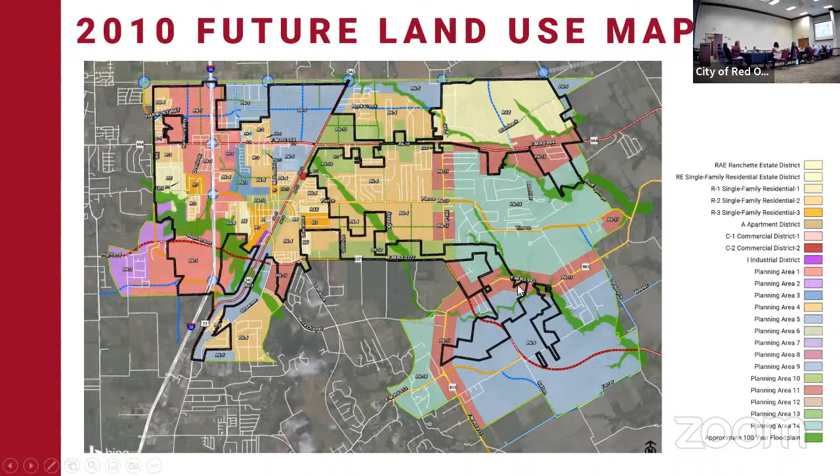So this is some of the things that we looked at in 2010. This is that future land use map today. The lighter black line still just defines your city limits, and you'll see we've got everything defined out to all of our ETJ. And then we've got a few areas highlighted in this bold black area that I wanted to touch on a little bit.

This one up here in the top right, this blue area, that was a change, and that was something we looked at because this purple line, which you'll hear in just a minute when Brian goes through the transportation plan, is the current proposed alignment of Loop 9. So we know that's going to have a big effect on Red Oak and what changes here. That was one of the significant changes.

Some of this area right here, this hot pink along 342, we've changed a little bit to map some of the current developments going on. And then there were some changes if you compare the plans. Generally it still remains a residential area, but we were careful to also look at some of the industrial uses and data centers and the opportunities you have with that, and also recognizing there are some challenges with water service down in this area. So this plan takes that into account.

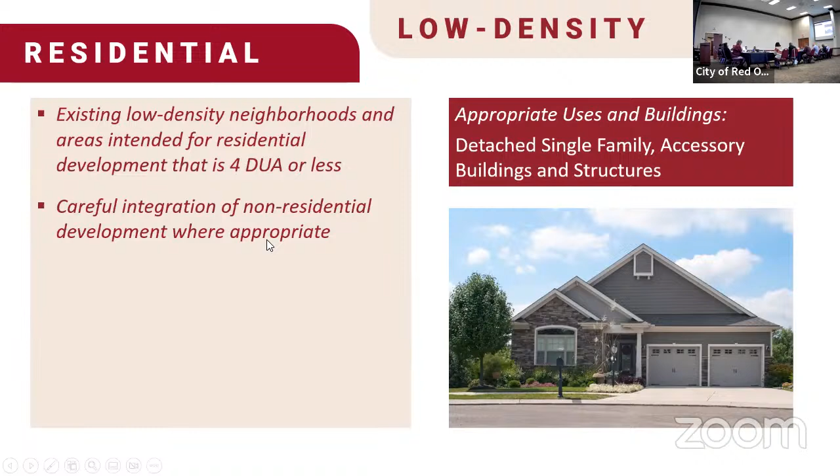So in each of those land use categories, we wanted to put definitions so when you see those types of things, you know what they are. Within our residential categories, we've got a ranch estate category, which is that 1 acre dwelling unit or lot sizes over 1 acre, in some of our rural areas, probably mostly in the eastern areas of the city, some on septic as they come down in that southeast area. We then have low density residential, development of about 4 dwelling units or less - this is just an example of what would fit into that category.

These categories are explained in the pages after page 35. We have a medium density category - you can see examples of row homes, townhomes, the types of houses appropriate within that category. We have a high density category, where we flip over and look at houses that exceed 11 dwelling units, and we've got criteria for what that would look like.

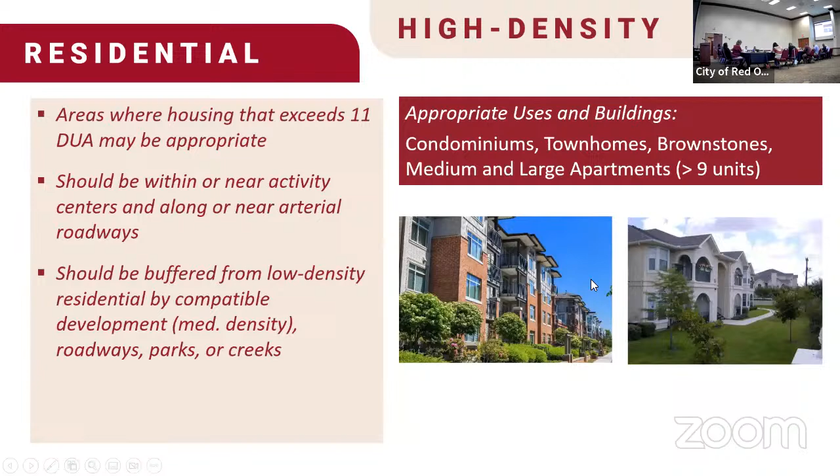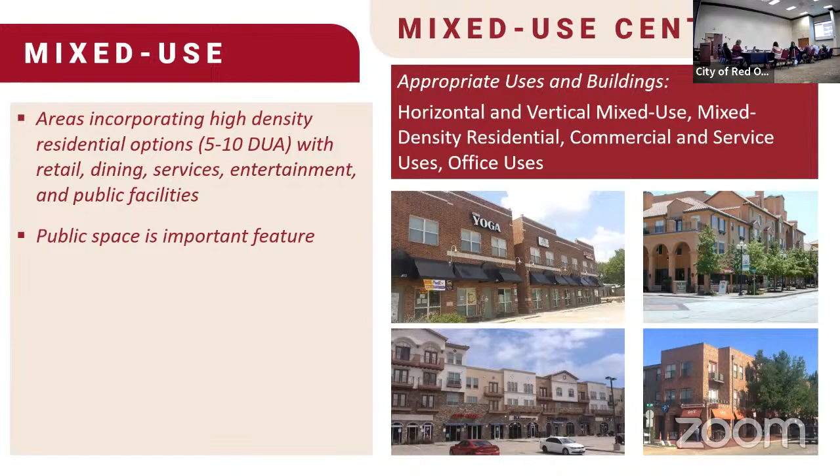Then we have a mixed use category, where you truly see a mix of uses, be it residential and commercial - you see different types of examples within these photos. Then within our non-residential categories, you've got retail categories, which I'm sure you're all familiar with, from different types of retail and restaurant environments that would fit within that.

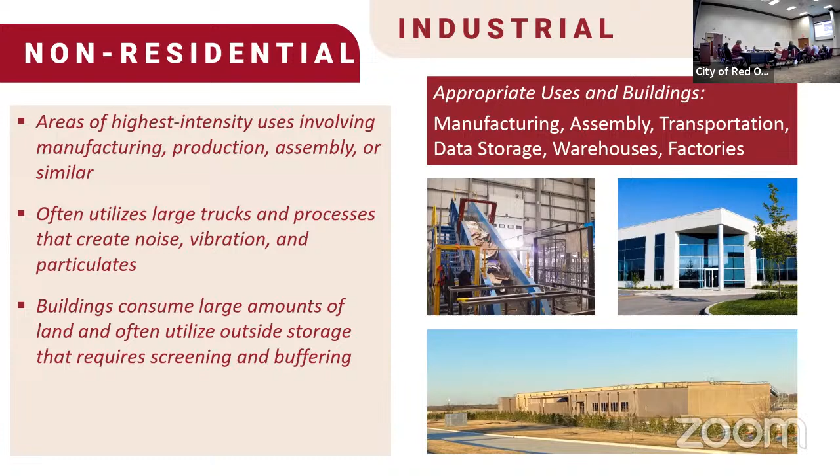We have our commercial category, which is more your bigger restaurant, office, and strip center type development. We have an industrial category for manufacturing, assembly, data storage, warehouses. And then we have an office category for medical, real estate, and other professional services. We have a public and semi-public category, which is a lot of your schools, hospitals, churches, those types of uses.

And then we have an Old Town overlay, that is primarily mixed use, but working primarily within your Old Town and downtown area. Overall, the page that follows the land use chapter goes through specific actions related to land use. Without reading every one, some key things are looking at choices, making sure we have diverse neighborhoods, and looking at the areas within the ETJ. Each of those recommendations ties back to one or more of the guiding principles within the plan.

Let me point out, I know council is aware, and P&Z probably too - Parks doesn't deal with zoning much, and for some staff. A lot of these planning areas, the uses overlap within a planning area. So that means you can't just say, okay, I'm in planning area 5, so I just want to put residential in this whole big planning area. That's not exactly how it works, because then you bring it back down and do a PD.

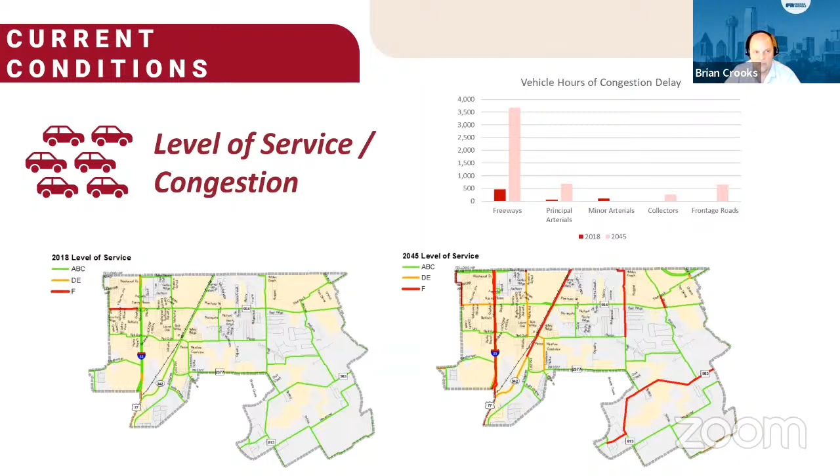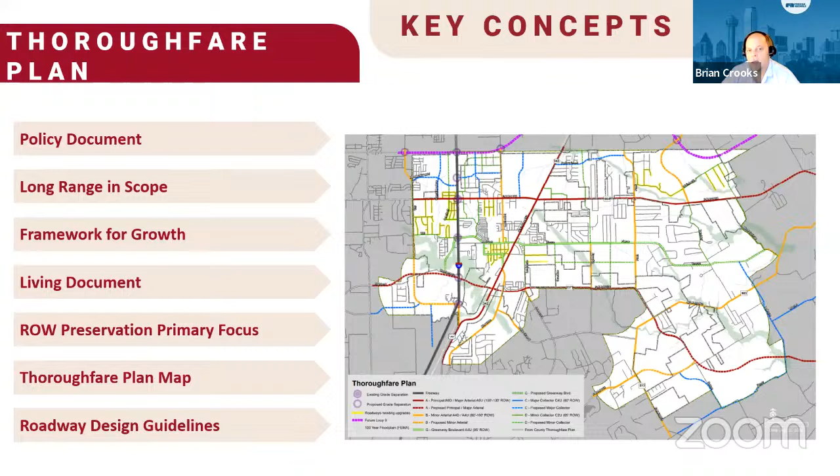In terms of changes from the previous plan, one of the biggest changes is Loop 9. We have connections to the proposed grade separations that TxDOT has to the north. We're also seeing a revised greenway network and some collector network updates. In the eastern area, we're not seeing very many changes at all, no real changes to the eastern thoroughfare plans. And then we see the extension of Old Road across to 35.

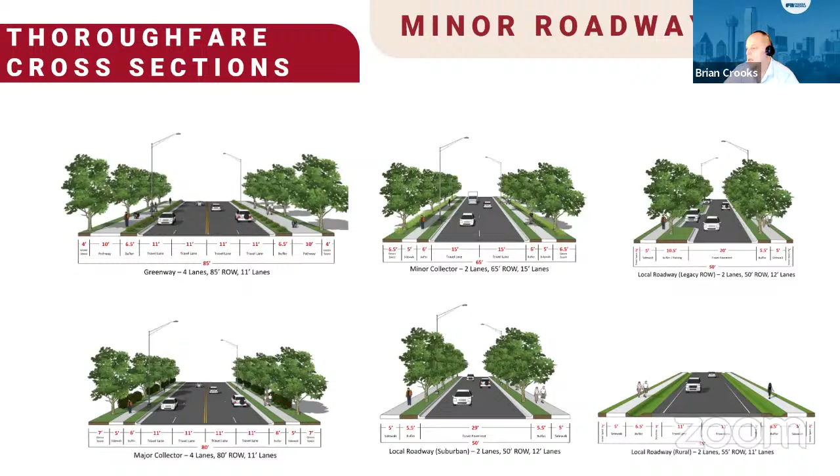So, summary: what are the most important things? One, we have to regularly update the plan, so that as new projects come up, whether within the city or external like Loop 9, the plan is revised to take advantage of these changes. Again, with the rise of remote work, it's important to review emerging technologies and see how we can apply them to the city. We also want to apply these thoroughfare design standards to our zoning ordinances and other plans to ensure continuity and connectivity. And we want to participate in regional planning efforts through COG and the state to take advantage of opportunities, whether funding or coordinating with other agencies on new programs, so we get the best value for our transportation dollar.

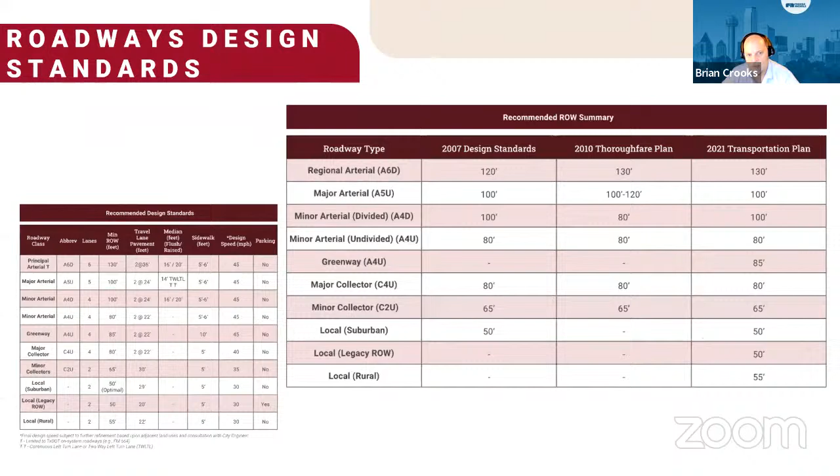One thing I should have mentioned is that the plan includes extending FM 2377 across IH35 - another needed east-west connection. Wendy, can you go back up a couple of slides to the thoroughfare plan? There we go. If you look at FM 2377, we want to extend that all the way across SH342 and IH35 to get that additional east-west connection, because we're concerned that FM 664 won't be enough long-term - we're going to need another east-west connection.

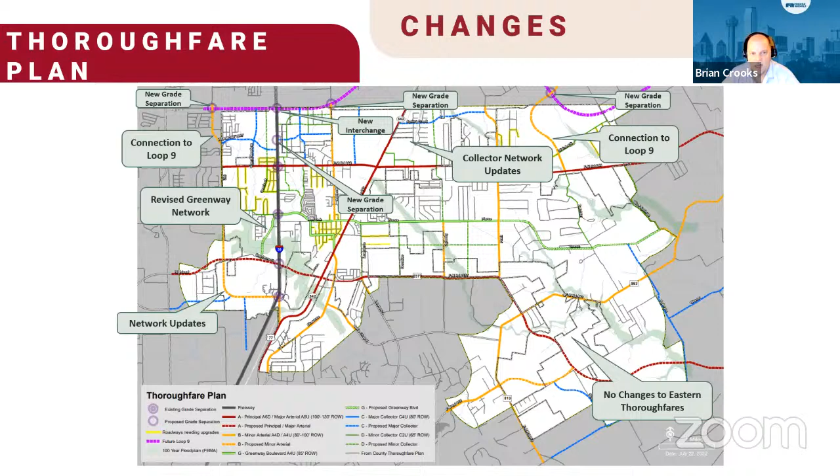Okay, Wendy, can you take me all the way back? And then, to construct the Greenway corridor is one of our final recommendations.

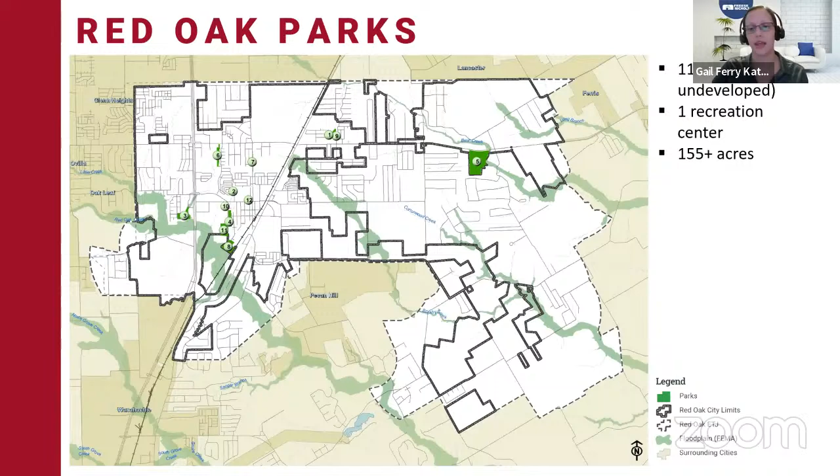The needs assessment was a 3-pronged analysis. We had a demand-based assessment, where we looked at all the input received from the community to determine, from their standpoint, what the parks and recreation needs are. Standards-based looks at the quantity and location of parkland - the size and types of parks and the areas they serve - and then the amount of amenities, like the number of playgrounds and basketball courts, for example.

And then the resource-based assessment looks at your natural and man-made resources to see what might be further leveraged for recreational benefit. So I'm going to present just a few highlights from it on the next slide.

One of the things I like to bring to the forefront is what we heard from you all, some of the stakeholders we talked to at the beginning of the process, and working with our committee throughout. Some key desires that came up were expanding the trail network, developing indoor recreation options at a recreation center, for example a skate park, having outdoor spaces for events, maybe some space for food trucks, and access to Wi-Fi in the parks.

In terms of issues and concerns, the biggest things we heard were that not everybody knows what is out there, what the options are, or where the parks are. And I think the next slide is a very telling survey response. We had close to 300 survey responses, and when we asked the community if they could only do one thing to their parks and recreation system, what would they do? It was adding trails, providing opportunities for kids and teens to have additional recreation options, and in general just adding. So there wasn't a huge amount of concern about what was there now - it was a desire for more.

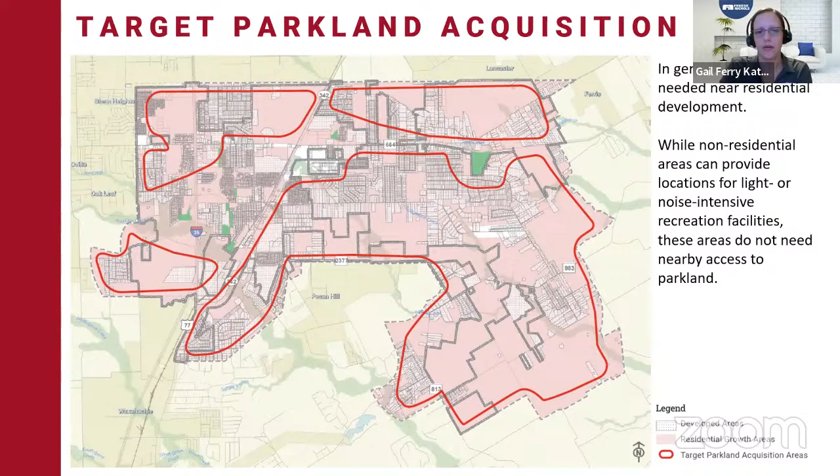On the next slide, you'll see the target trail corridors or potential trail corridors. We've identified areas for both on-street and off-street connectivity. So on-street would be some of the facilities you saw in those street sections earlier, and then off-street would be more of trail along the creeks or through the floodplains, for example.

Some of these segments do include existing sidewalks that can be leveraged to help connect the whole system. Some will require coordination with private landowners. And as you're thinking about prioritization of the trail system, the more that you can prioritize trails that are within that half mile of where people are living, the more people will be able to walk out their door and get onto the trails and ideally into the parks from there.

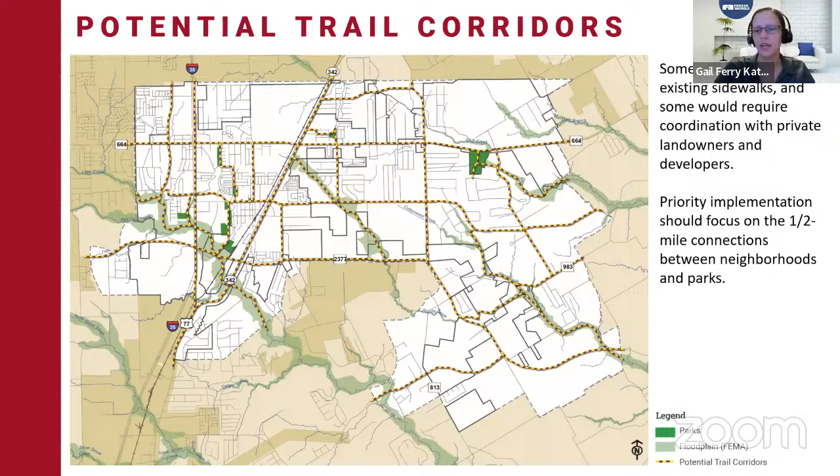On the next slide, we have the remainder of the parks recommendations. In terms of recreational programming, we do recommend a recreational programming assessment, which is basically looking at all of the recreational programming that is offered to your community today through other organizations, and then identifying some gaps and areas where the city can come in and help to support or provide programming for children, youth, adults, and seniors.

Having additional community events in other parks throughout the city can help people get more familiar with what is available. And then also having a Parks and Rec website, which is updated with park maps, where are things located, what is available in terms of programming or events, so that if people want to know what's going on, they can find it easily on the website.

In terms of safety, maintenance, and accessibility, it's going to be really important to make sure that the amount of staffing and parks funding is appropriate for the level of parkland that you have. So you already have a substantial amount of parkland, and as that grows over time, you want to make sure you have additional staffing and funding to make sure that those parks remain well maintained.

Oftentimes, a poorly maintained park is actually seen as almost worse than no park at all. So you want to make sure that you're budgeting for that. Having consistent park signage and park design guidelines can help people get a better understanding just by looking at it of what is a city park. We want to make sure that any ADA accessibility issues are addressed on a prioritized basis, having appropriate storage for your maintenance equipment, and maybe looking at some additional irrigation areas.

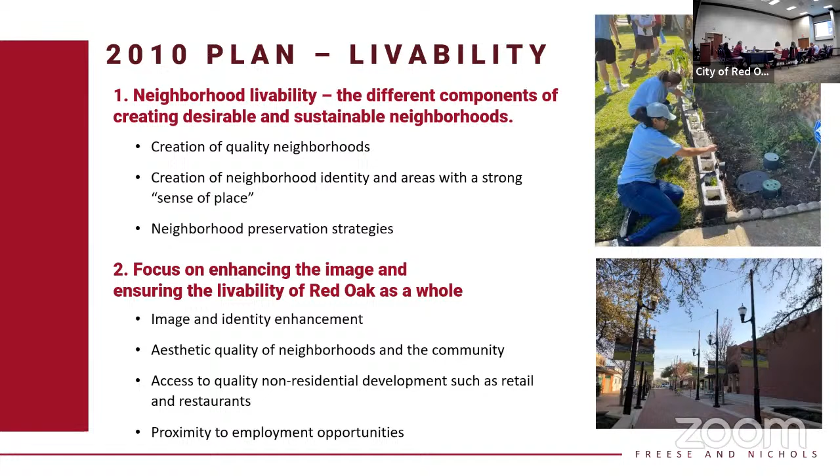So moving on to the next chapter in your report is the community enhancement. These are all those things that differentiate you, as a city that make this be a place that you want to live. In 2010, we called that livability, and I'm pointing out some of these differences because sometimes it's often asked, what changed from before. So we called that livability, and we were really focusing on neighborhood livability and enhancing the image as a whole in terms of branding and identity and gateway and quality aesthetics. So that's what we talked about in this plan.

We changed that to community enhancement because it is about livability, and there's still those same top things that we want to preserve in our current neighborhoods. But we also want to create better places, thinking about our residential landscape and the way some of our beautification things are done, and looking at livability from what's trending in what they call missing middle housing.

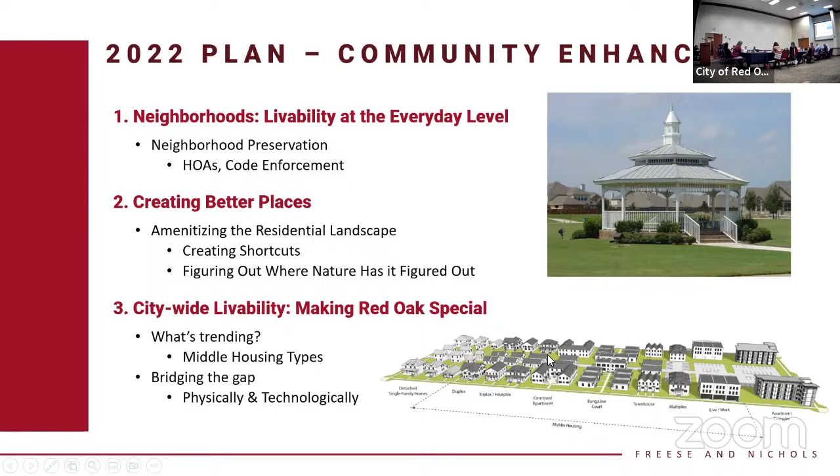Traditionally we've thought of single-family homes and apartments, with not much in between. But there's a whole lot in between, and we're seeing a lot more of those types of products that haven't completely made it here, or that there's opportunity for a lot more of. So that's something we've addressed in this plan, bridging that gap of different housing types within Red Oak.

This slide, and the last page of that chapter, talk about some of the key recommendations within the plan. I know one of the things we talked a lot about is building materials, how do we get things up to different standards, and how do we look at incentivizing those types of things as businesses come in.

I do think that's one of the interesting things Red Oak does with your planning areas - it gives you flexibility. Some cities don't like that; they want to be pretty rigid in their development. Sometimes that can be a good thing, but I think you've maintained some flexibility generally, and that's what those planning areas help define, so you're able to work with developments that come forward to increase standards, do good landscaping, good materials, and the types of things we want to see in the plan.

The next chapter is economic development. We touched on this lightly because there were some things already set in place, but we did define an overall set of chapter goals, looking at policy from economic strategy to diversify your city's economy, position Red Oak to be a premier destination in southern Dallas and Ellis County, and support the growth and innovative tools you have in place between your EDC and your IDC, creating a vision that aligns those things together.

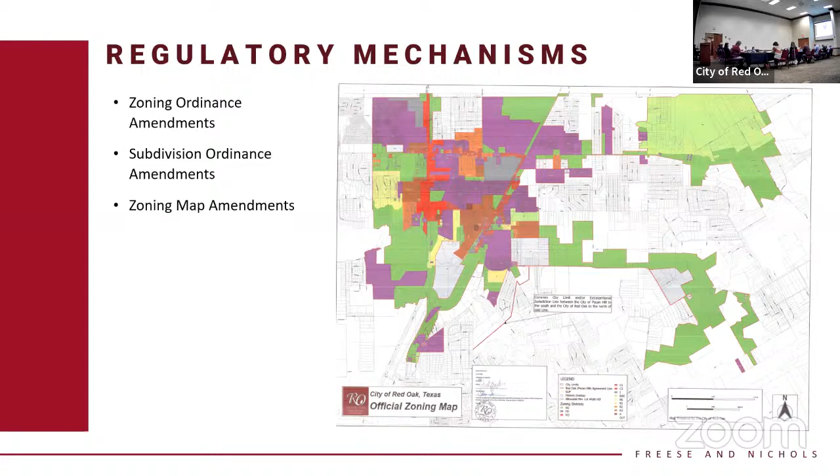There are a lot of different ways we can incorporate items. There are regulatory mechanisms that go in your zoning ordinance, subdivision ordinance, and making amendments to your map. There's CIP and funding mechanisms, some of which will get done within your capital improvement plan. We've listed some of the funding mechanisms, and thankfully there continue to be more opportunities for funding mechanisms right now.

Hazard mitigation is a big one that we're looking at right now with some of the mitigation funds, and BRIC funding, building resilient communities funding that's out there. So there's actually some new things that we just started doing that I'll make sure to pass on to you guys in terms of some opportunities for funding.

Normally we don't get a lot of funding to be able to do codes and things like that, but within some of the BRIC funding right now, there is an opportunity to update codes within that, which is good because it gives us the opportunity to get some funding for planning type services.